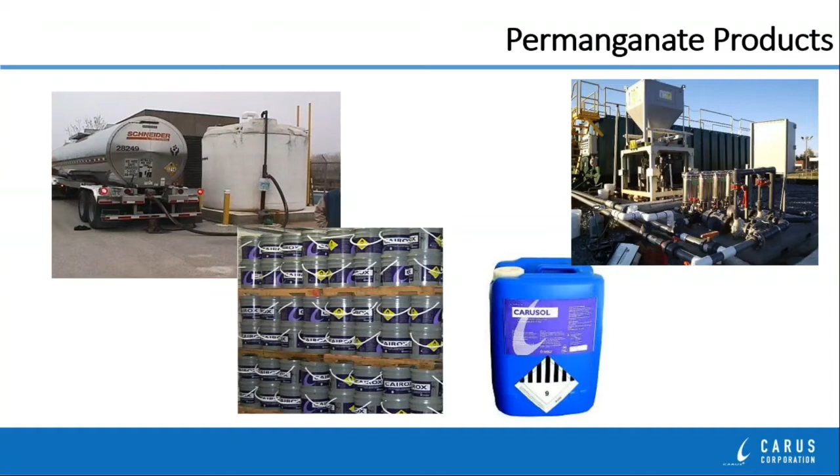So let's start with the permanganate products. Hopefully many of you are already familiar with how permanganate is packaged and delivered, but let me review that real quickly here. First of all, permanganate is available as a dry solid material. That's the CAIROX brand material that is potassium permanganate in its chemistry. It's available in different product grades, starting with technical grade, and probably the most popular grade is the free-flowing grade. They're essentially the same product, except that free-flowing has a desiccant that's blended into it at about 1% concentration.

So the product assays vary by about 1%, but the idea of blending in a desiccant is that you retard or slow down any type of water absorption into the product from the humidity in the air, and that prevents it from caking or lumping when you're storing it for a long period of time as a dry crystalline material, especially if you're storing it in a silo or in some type of hopper that feeds a dry chemical feeder.

In addition to those two popular grades, we have permanganates that are 99% pure, and those are the pharma grade materials which conform to the US Pharmacopoeia, and also ACS reagent grade, which is the type of permanganate that is typically packaged in small 1 or 5 pound jars and is used in laboratories for reagent use. The dry permanganate comes in a packaged sealed container and is quite stable over a long period of time in that sealed container.

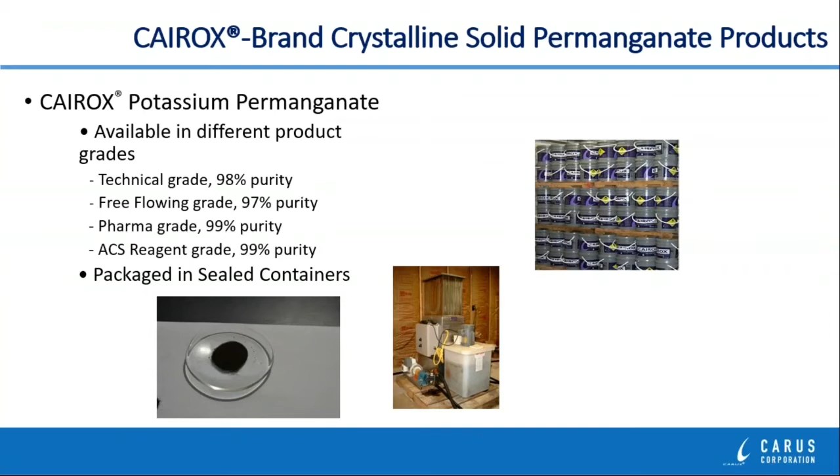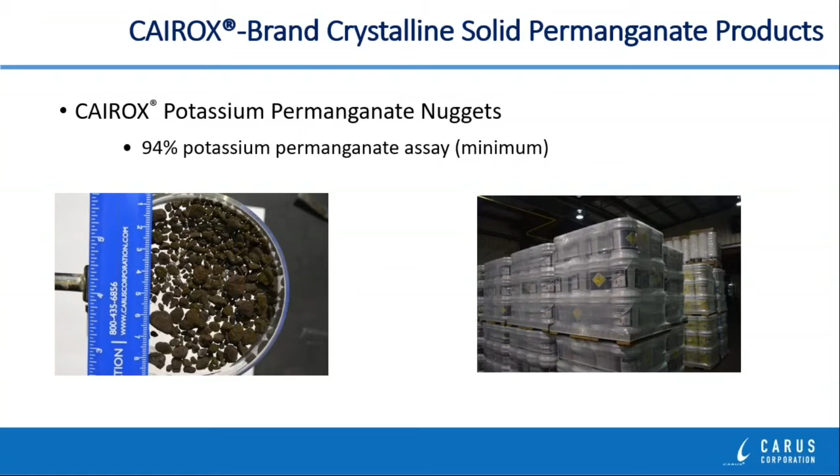Now, there are some special physical sizes of dry permanganates that are also packaged and delivered. Here you can see a reference to permanganate nuggets, which are slightly less pure than the other products, but they come in rather large, chunky crystal sizes. That allows them to be used especially for broadcasting into water ponds or lagoons where they can sink slowly to the bottom through the water column. And also, if you're outdoors doing this, they are less dusty than some of the finer powdery technical or free-flowing grade materials.

We also now are producing slow release or controlled release permanganate tablets. These dissolve very slowly when they're immersed in a flowing water stream and provide a relatively constant dosage depending on the flow rate of the water.

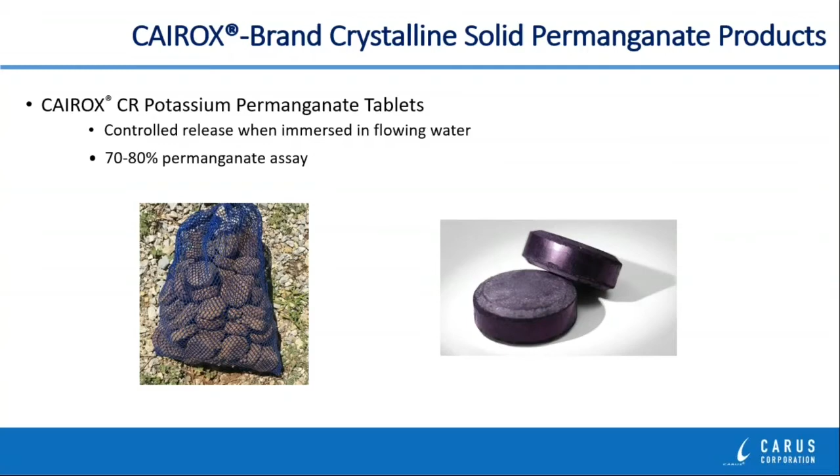They're really used for locations where it's not possible to set up a dry chemical feed system or a liquid feed system of any type, maybe because there's no electricity available or no mixing water available at that site, or a site that might be submerged in some way, and they're quite popular in wastewater treatment applications.

In addition to the dry crystalline products, there are pre-mixed concentrated liquids that are available under the CARUSOL brand name. And there are really two grades of material that we supply currently. One is 20% active ingredient. It's called CARUSOL liquid permanganate. And the second is a 40% active ingredient called CARUSOL C, or concentrated liquid permanganate. And it is available in a variety of different sealed package container sizes.

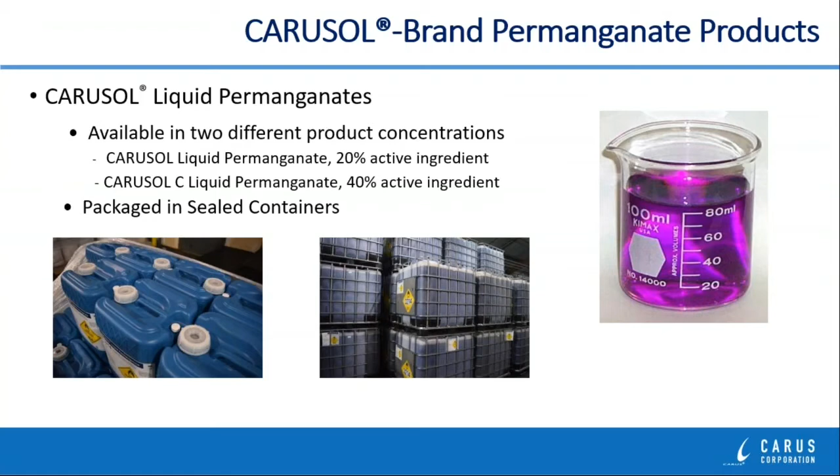So what is permanganate? The potassium permanganate chemical formula is KMnO4, and the liquid permanganate products are sodium permanganate, whose chemical formula is NaMnO4. As I mentioned earlier, it's a stable oxidizing agent, which means we can produce it and package it and deliver it as a dry powder or as a concentrated liquid. And it can be stored and delivered to the end user and stored there for quite a long period of time. It has a shelf life that is really greater than a year.

Also, because it's stable, it's pretty inherently safe to have around, especially if it's in its closed container. There are some specific recommendations for storing these materials, but there are no decomposition products, no degassing that occurs with these products. So they're very, very easy to use and to store.

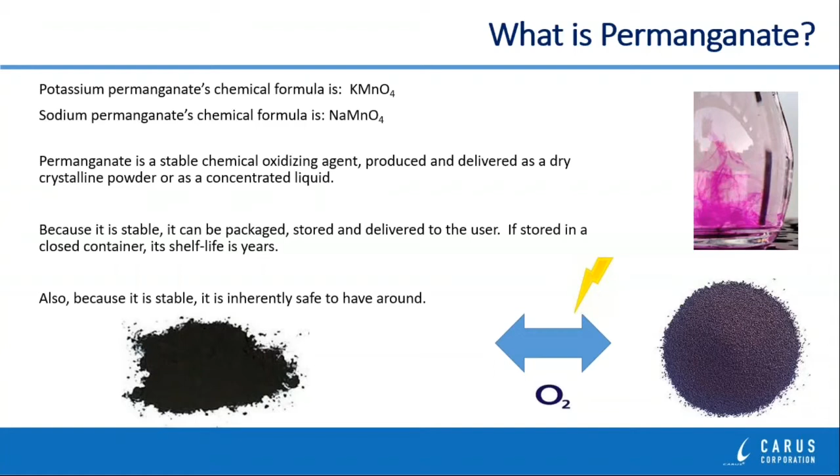These products are manufactured in our plant in LaSalle, Illinois. We receive manganese oxide ore, which is mined out of the ground, and then we react it in a large reactor where we use oxygen and also some electricity to increase its oxidation state from 4 to 7. And when we get to 7, we are at the permanganate state. And when the customer uses permanganate, they are simply taking that oxygen and that energy back out again and returning the permanganate down to its manganese oxide ore state again.

Now let me focus a little bit on permanganate chemistry. First of all, I put permanganate really into two buckets, which make it easy to identify. First of all, permanganate is a manganese compound. I bring that up primarily because it's very easy to confuse manganese and magnesium, which are really two different types of elements. So remember that permanganate as a manganese compound is a transition metal, and it's in the periodic table right next to iron in that particular row.

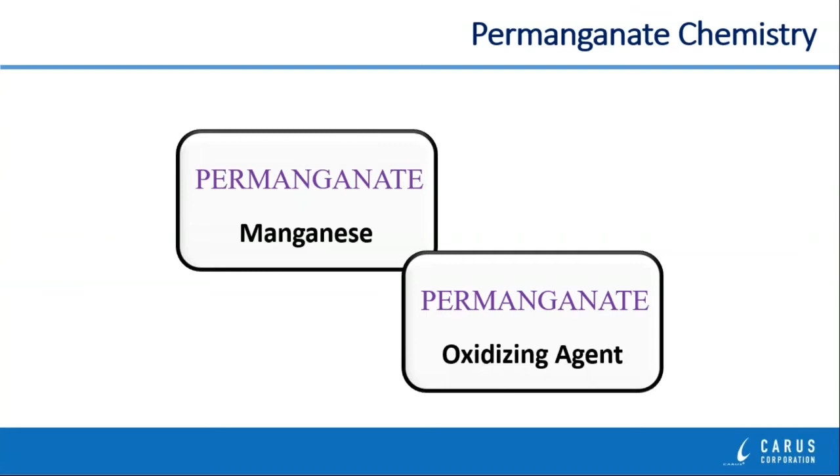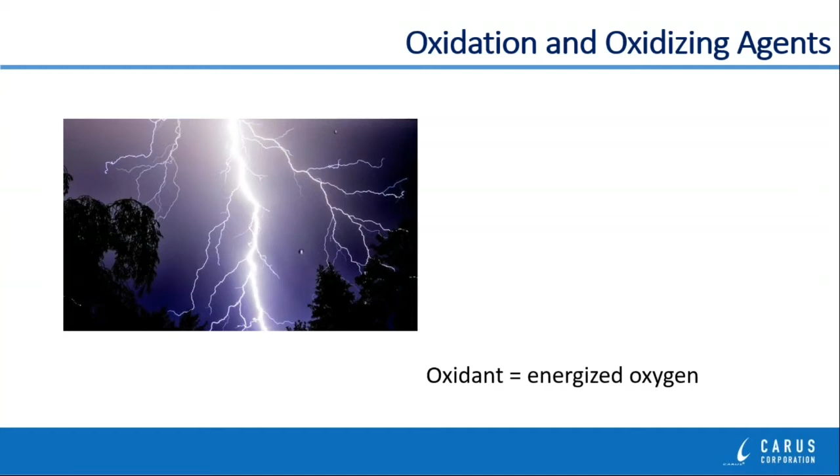Now, permanganate is also an oxidizing agent. As I mentioned, when we manufacture it, we put some energy into the manganese, we add some oxygen to it, and it's that oxidizing nature that the customer is using when they use the product. Oxidizing chemistry shouldn't be a foreign topic to everybody. In the easiest explanation of what it is, I just refer to it as energized oxygen. And of course, that's something that we use pretty much every day.

The reason for that is because we live and survive in an atmosphere that is a very high percentage of oxygen. So we are surrounded in the environment with different types of oxidation reactions that occur. Everybody should probably be familiar with just the rusting of iron metal, which is a reaction with the oxygen in the air and the iron metal itself to form the red iron oxides. That's a rather slow process, and it takes a long period of time to go to completion.

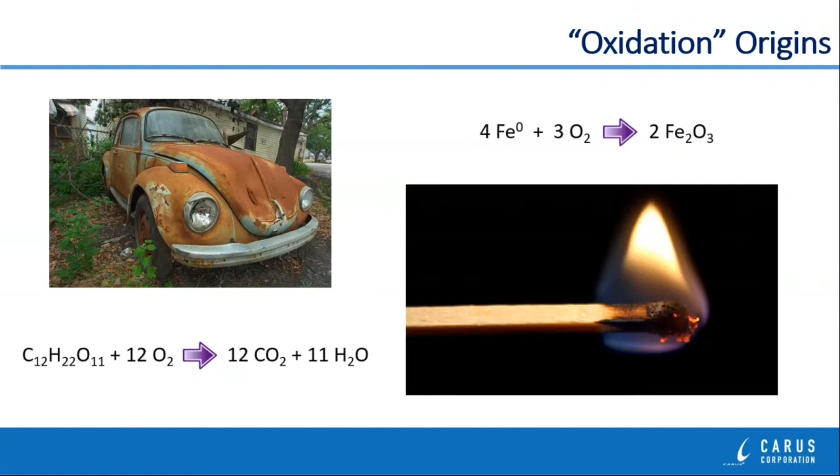There can be oxidizing reactions that take place that are very rapid and very fast, such as the burning of fuel. And they're fast enough and rapid enough that the exothermic nature of that reaction produces light and heat when it occurs. And the complete oxidation of organic materials, in this case a wooden match, will eventually end up as just carbon dioxide and water if the reaction goes to completion.

Now, to the chemists, oxidation and reduction reactions really have to do with the transfer of electrons from one compound into another. And that's a little bit more formal explanation of what it is, but the transition metals such as manganese and such as iron are really good at giving up or accepting electrons in different types of reactions that they might be involved in.

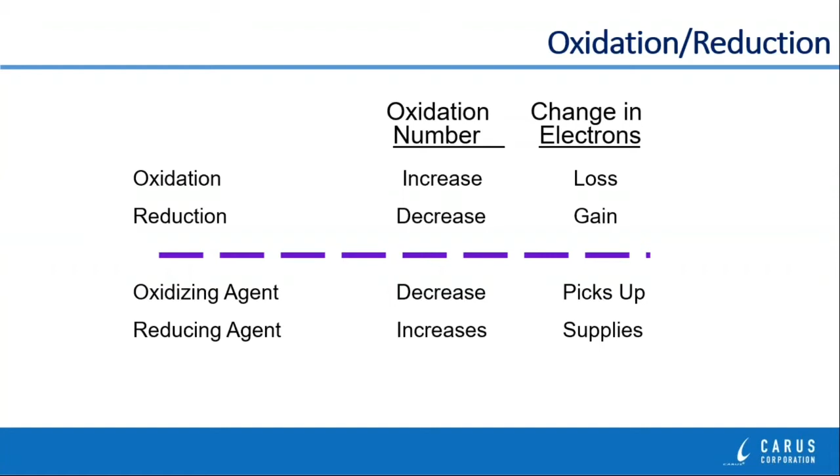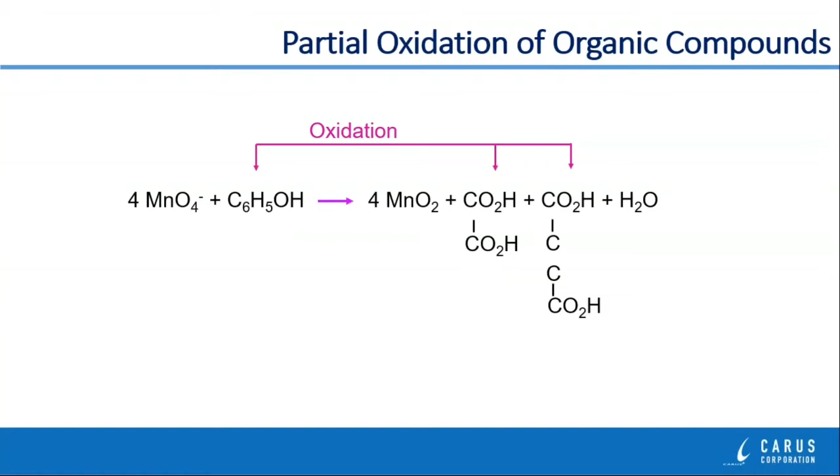Here's an example of an oxidation reaction that we would typically have with an organic molecule in most of the environmental oxidation reactions that we're doing. I mentioned earlier that a complete oxidation reaction with an organic material would go to carbon dioxide and water. In the environment, that typically never really happens because the conditions that we're following aren't rigorous enough to drive it to that endpoint. So typically what you have is the oxidation of an organic molecule where you're fragmenting it, taking a big molecule and turning it into smaller molecules. In the case of permanganate, organic acids are a very common byproduct or end product for that partial oxidation reaction.

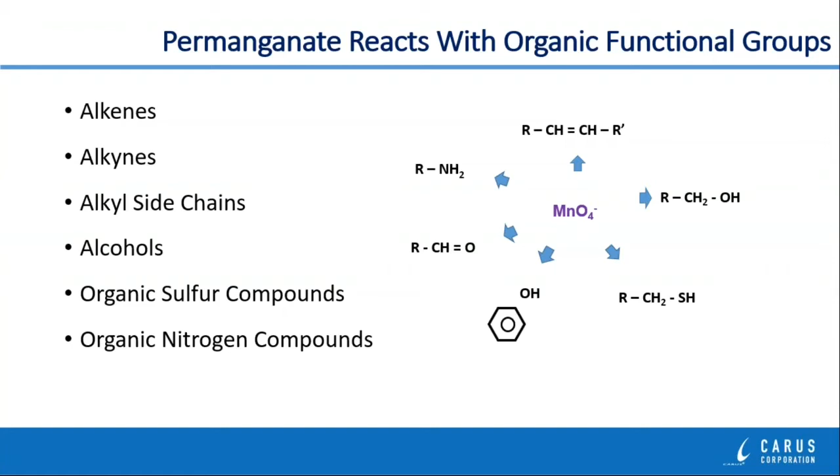We may also react with alcohol groups or the sulfur equivalent of an alcohol group, which would be a mercaptan. You can react with some aromatic groups, especially if there are electron donating functional groups on the ring. So the case of phenol that you can see in the lower left-hand portion of the diagram reacts very, very quickly with permanganate. You can react with alcohols, aldehydes, ketones, and esters very nicely with permanganate as well. And then the nitrogen equivalent of an alcohol group, which would be amine groups on an organic molecule, react very nicely with permanganate too.

In most reactions that you deal with in chemistry, the pH conditions will affect the reaction speed and in some cases what the endpoints are. In the case of permanganate, we don't really worry too much about the pH of the reaction because most of our reactions occur in the pH range of 3 to 12. And in those cases, we're going to accept 3 electrons on the permanganate, and we're going to produce that MnO2 solid material, the manganese oxide, that is familiar in most permanganate oxidation reactions.

There are some differences that occur if the system is extremely acidic. So here I'm showing that as less than pH 3, where you may have a complete 5 electron transfer occur. Or when the alkalinity is very high, that I'm showing here as greater than pH 12, where you can accept 1 electron and go from permanganate to manganate species very easily. But those 2 extreme conditions are very rare in most of the applications that we'll be talking about today.

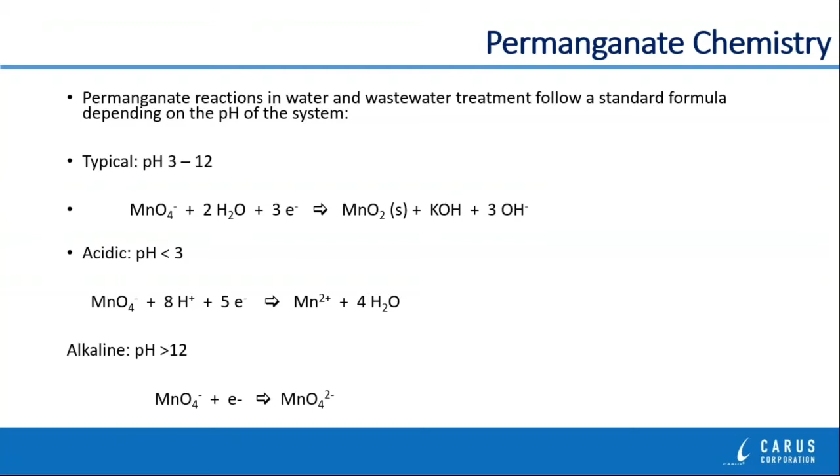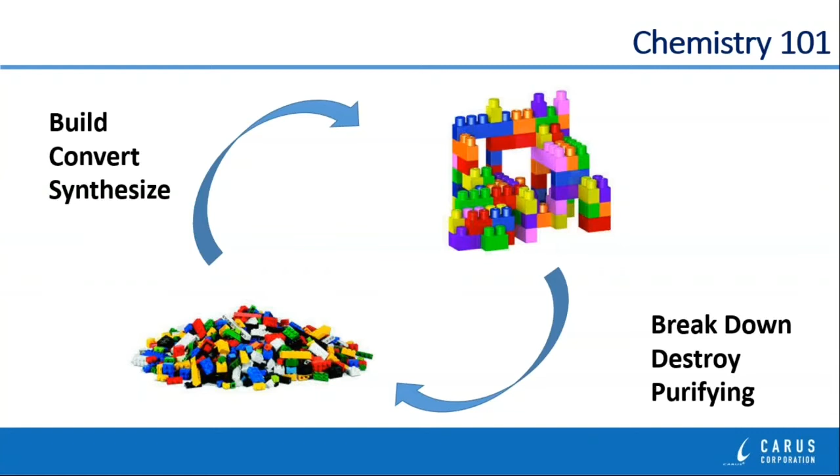Now let me talk a little bit about oxidation chemistry in general. It's really kind of a fun chemistry. It's a chemistry that you can read about in the chemistry textbooks, especially organic chemistry textbooks, because most chemists are interested in using oxidation chemistry to build or synthesize some type of particular end product that they need as an active ingredient or as some type of useful organic that can be used in a different kind of application. That's a little bit different than a lot of the applications that we deal with on a daily basis, which are those on the right-hand side of this screen, which talk about breaking something down or destroying it or purifying it. So we're going in sort of the opposite direction. We're taking large molecules and making them into smaller ones.

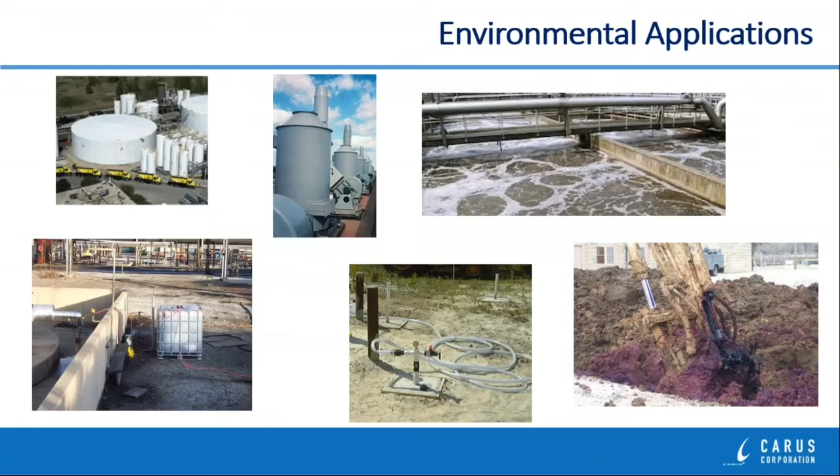So let me talk a little bit about several of those environmental applications. First of all, there are the applications where we're treating a contaminated soil to remove very specific types of impurities that might have been disposed of improperly there in the soil. If you want to reuse and build on this particular site, it's necessary to go in and remediate it in a relatively short-term type of application.

And here permanganate is used quite often, in particular to remove or destroy trichloroethylene or perchloroethylene, which are used as cleaning solvents in a lot of cases, and have seeped into the ground and can contaminate groundwater supplies. In some cases, the contamination can be deep underground, so the permanganate is actually injected through different types of wells that are inserted into the site. And sometimes the contamination is relatively close to the surface, where the permanganate can just be mixed in to the soil and allowed to react very, very quickly there.

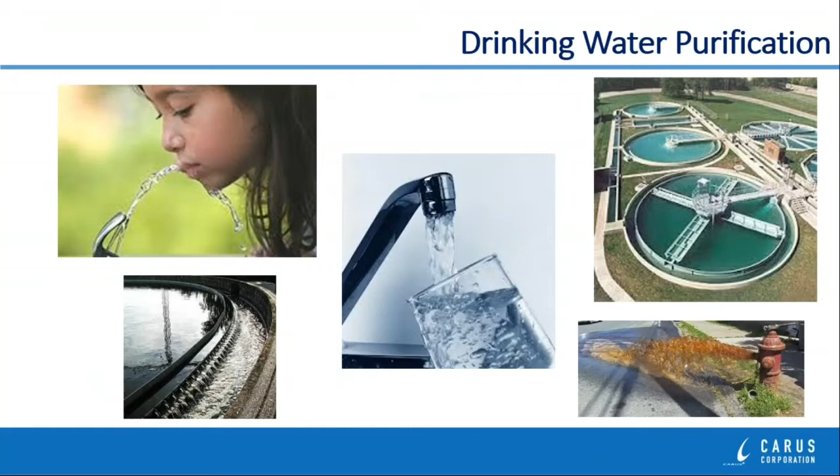Of course, permanganate has a long history, really about 100 years of history of being used to purify our drinking water supplies. There are several things to know about that. First of all, permanganate is used both with surface water supplies and with groundwater supplies. And of course, you can really categorize the contamination into one of two categories. Those are inorganic, natural, or man-made species. And in that category, you have metals in particular, such as iron and manganese, that can appear in either surface waters or groundwater supplies. Certainly sulfide material can be quite common in these supplies as well and can be found in either one of them.

In groundwater supplies, we also run into a couple of different types of contamination. We can run into radium, which is a naturally occurring material. There's no real oxidation reaction that takes place, but the radium is absorbed onto the manganese oxides that are produced from permanganate reactions and can be removed when those manganese oxides are filtered out of the system. In the case of arsenic, we're really talking about an oxidation reaction from arsenic 3 to arsenic 5, and then arsenic 5 can be absorbed onto metal oxides as well. Either iron oxides or manganese oxides work very, very well for arsenic absorption.

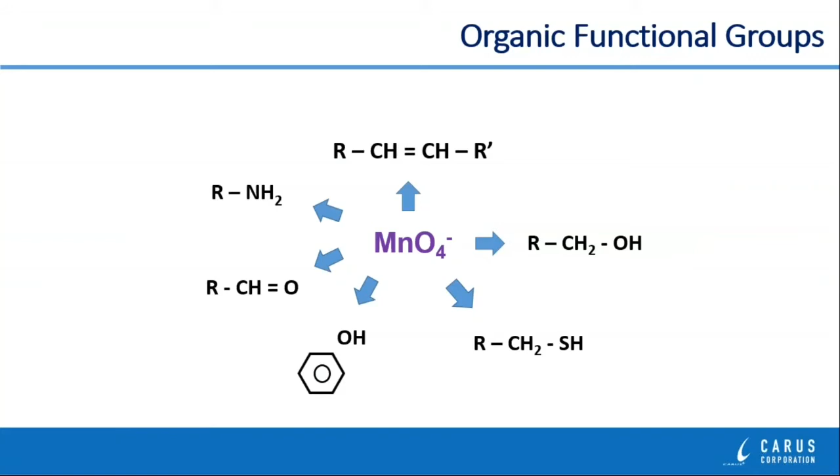So why is it important to think about the permanganate reactions and the functional groups that might be on an organic molecule? Well, it turns out that those functional groups and the structure of that organic molecule are what contributes to its characteristic taste or odor. If it's volatile and it's released from the water supply, our noses are quite good at monitoring these organic molecules and detecting them as some type of characteristic odor. And if we can, through oxidation treatment, attack or destroy those particular functional groups, it's possible then to get rid of the characteristic taste or the characteristic odor.

So in the case of permanganate, we're looking to react with the double bonds or triple bonds on those structures, or the functional groups such as the alcohol groups that might be present there. And there's another double bond that we might attack. And by breaking those organic materials down, our goal is to make them tasteless or odorless.

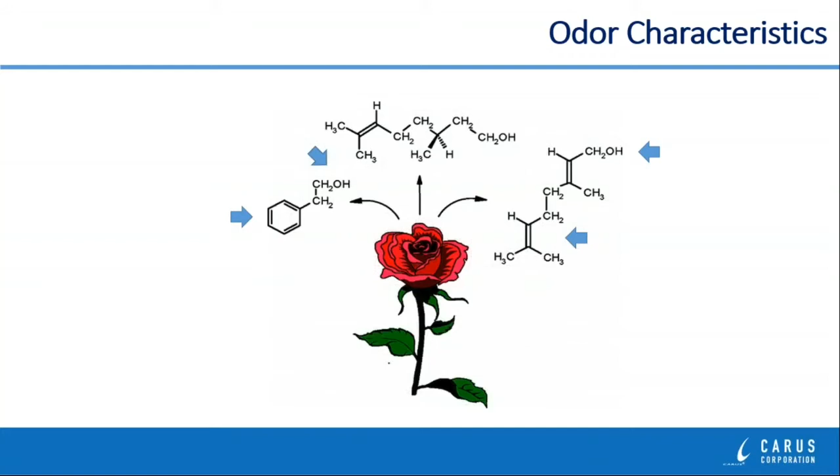Now let me concentrate very immediately here on inorganic compounds, because they're very, very easy to follow. There aren't that many oxidation reactions that we use on a daily basis to remove inorganics from water. The two most common ones are the removal of manganese or the removal of iron from water supplies.

And we do that simply by taking the dissolved ionic species, manganese 2 or iron 2, and converting them through oxidation chemistry to their byproducts that precipitate out as solids. And then our water treatment systems, especially our filters, can remove those solids and remove them from the water supply.

Hydrogen sulfide is removed by oxidation chemistry, and we go in a complete oxidation reaction from sulfide to sulfates. But there are many different byproducts of sulfide oxidation that can occur, everything from sulfur to sulfites to all the way to sulfates.

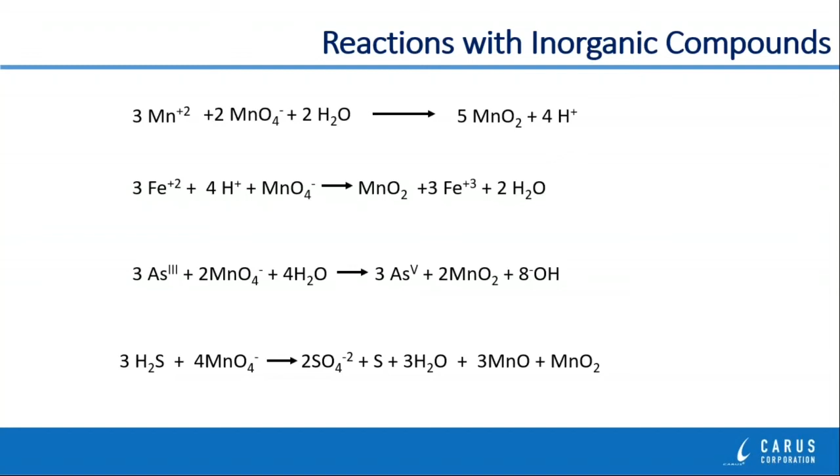The oxidation of soluble manganese is very well known when we use permanganate to do it. In fact, if you look at any textbooks, or if you travel globally and you talk to people about water treatment with permanganate, almost everybody will recognize that permanganate can be used to remove soluble manganese from water supplies. It's a very efficient way of doing it because you have two manganese compounds reacting together.

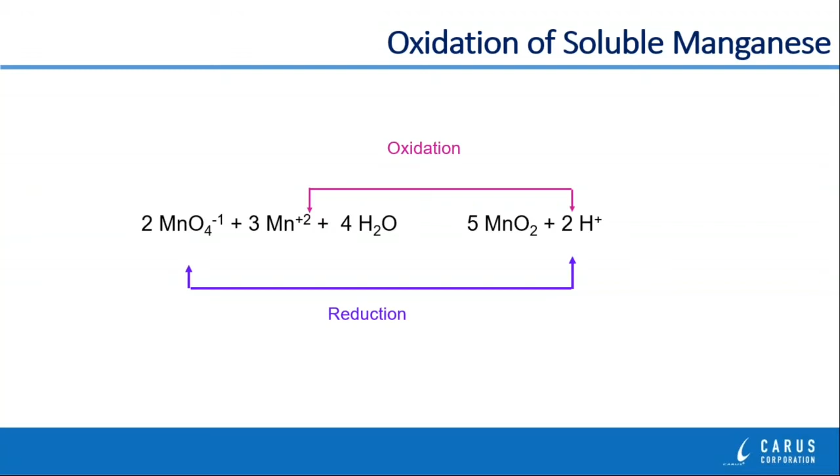So you form a large amount of MnO2 solids, and you can use those solids in a variety of different beneficial ways. One of the ways that we do that is, as I mentioned, by absorbing radium from groundwater supplies onto those manganese oxides. This was a reaction and an application that was investigated at the University of Iowa and has been instituted and applied now on full-scale systems.

In this particular case, we don't need the permanganate because there's no reaction with the radium there, but we do need the permanganate to react with manganese salts to produce the freshly precipitated manganese oxides that are used to absorb the radium out of the system.

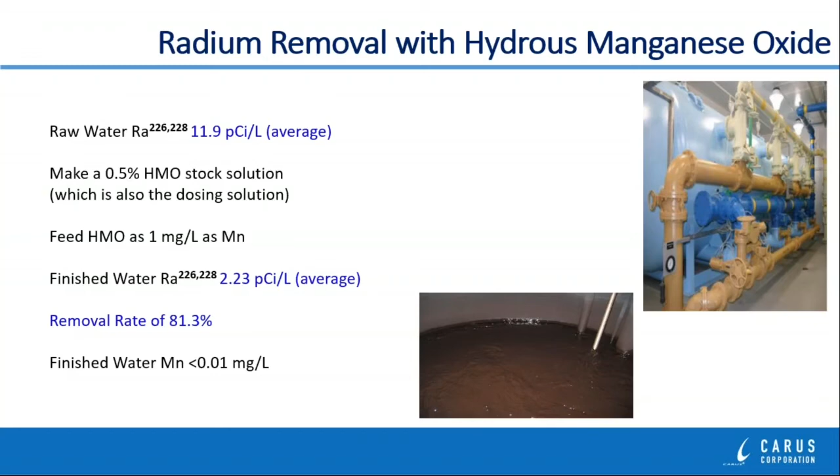Typically, these systems are groundwater supplies, so they have some type of pressure filter system associated with them. And there you can see a tank of the brown or black looking manganese oxides that we've produced. And those are injected directly into the water supply to do the absorption.

So in surface water supplies, we know that one of the contaminants that we can run into is biological in nature, and that's blue-green algae or cyanobacteria. The water industry has known about cyanobacteria for really decades, and they know it because it can grow in very, very high concentrations, and in fact create what are now referred to as HABs or harmful algal blooms.

We know what algae can do to a water system, right? Because of the high biomass, it can cause clogging of intake screens. It increases the requirements for coagulants because of all the biomass that's coming into a plant. If we're carrying it all the way to the filters, it can create short filter runs and increase backwash requirements.

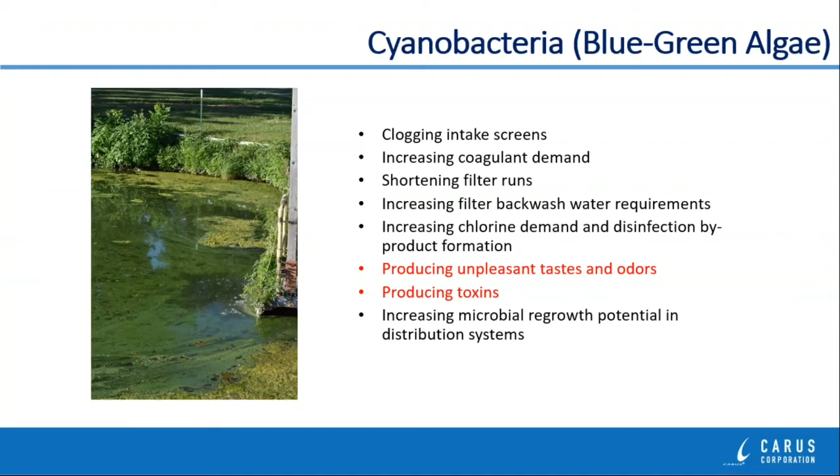It of course increases the demand for chlorine, and in doing that, it creates a lot of disinfection byproducts in reacting with the chlorine. We've known for a long time that they can produce compounds that create unpleasant tastes and odors in the water. And now, of course, we know that they can produce different types of algal toxins as well. So we're looking at all of these as organic materials and how can we control them, and how can oxidation chemistry help to control them.

So we would describe the characteristic as maybe being grassy or medicinal or fishy or musty, earthy in nature, or flowery. And this was before we maybe had the analytical capabilities of identifying specifically what the compound was that would be giving us those types of characteristics. So we would use odor panels and people's noses, right, to identify the intensity of that odor associated with water, and that panel would characterize what the odor was that they were smelling.

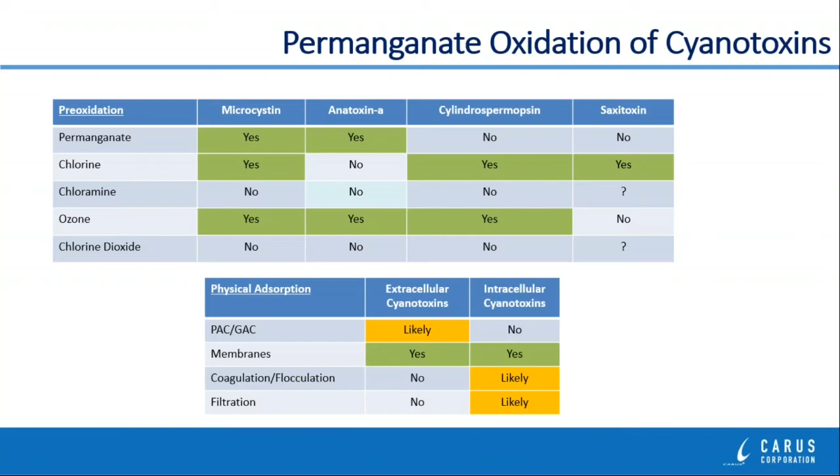Different types of filtration membranes remove these products. If these cyanotoxins are part of the bacterial cell, still their blue-green algae cell, then coagulation, flocculation, and filtration will likely capture a lot of them as well. But again, there is no silver bullet, and what we rely on in the water industry is a multi-phase approach or a multi-stage approach to removing any of these particular types of contaminants that we might find in a raw water supply.

So where is permanganate used in a drinking water supply? It's usually added as one of the very first chemicals in the treatment process, usually directly to the raw water supply itself. Why is it used early in the treatment process? Well, there are really 3 or 4 particular reasons. First of all, as you've seen from some of the pictures that I've been showing today, when you put permanganate into water, you have a very characteristic pink or purple color that is formed from the mixing of permanganate and the dissolving of permanganate in the water.

Well, we want that pink or purple color to go away early in the process. So we want the reactions to take place early, and we need a little bit of time for those reactions to take place. So if permanganate can be the first item that goes in, that usually provides us with some time before the flocculators or before the rapid mix even, where our coagulants are added. Remember, when permanganate reacts, it precipitates out as a manganese oxide floc material. So we want to be able to capture that material and settle it out in the water treatment process, or at least filter it out in the water treatment process.

So we would like to have all that MnO2 formed at the point of coagulant addition, which is typically at the rapid mix. If we can't get it formed that early, it can still be removed in the flocculation zone pretty typically, so that we can take advantage of the time in that flocculation zone as well. But we try not to carry it too far into the sedimentation basin because we do want it to grow in size and we want it to settle out before we get to the filters.

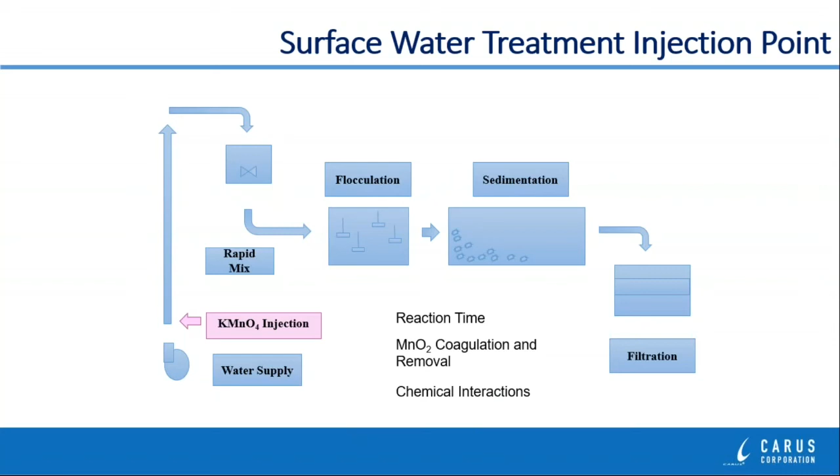In groundwater systems, I mentioned typically what you will see is a pressure filter of some type. Now, because in groundwater supplies, what we're usually trying to remove are sulfides or dissolved iron or dissolved manganese, the advantage we have is that those reactions are very, very rapid. They go within a matter of minutes. And so the short period of time in the pipeline ahead of the filter and the headspace in the filter itself provides us with more than enough time for those reactions to go to completion.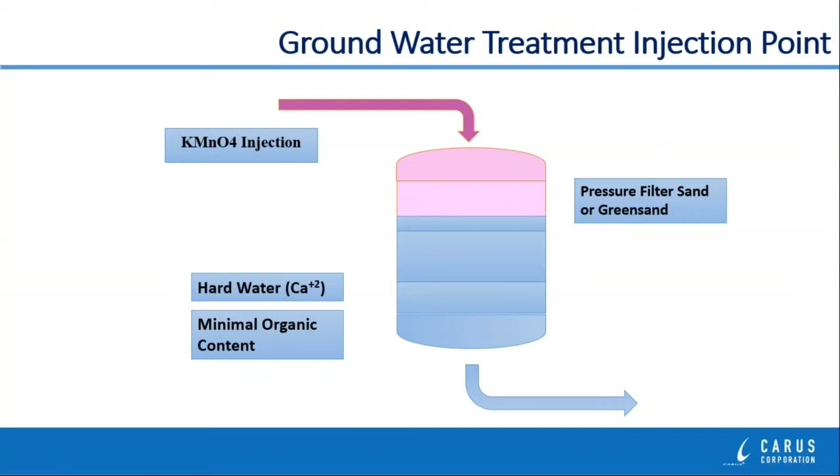In some cases, the pressure filters use special sand in them that is referred to as greensand or manganese treated greensand. And that sand is also an oxidation chemistry and can remove some iron and some manganese on its own as well. But typically, permanganate is fed continuously ahead of a greensand filter so that you have the combination treatment of the permanganate and the sand itself for removing those particular types of compounds.

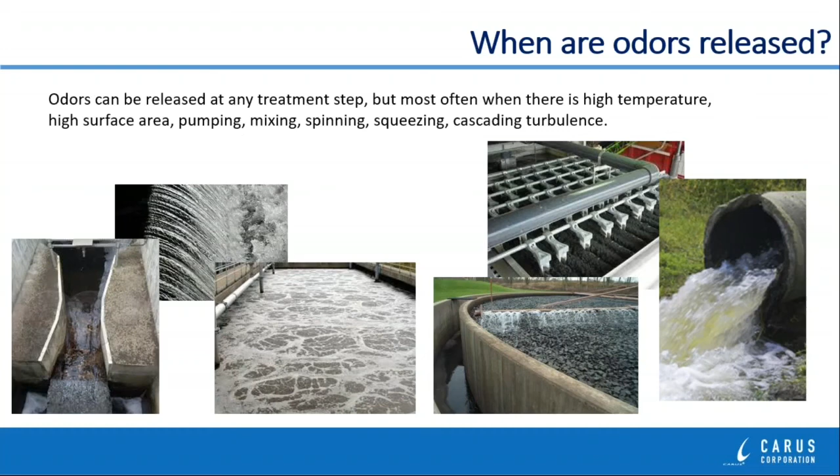They are released wherever you have turbulence being created in a wastewater system, because the turbulence allows that volatile material to leave the water and go into the atmosphere. The application treatment points for permanganate will almost always be categorized by where in the system we're talking about the odor occurring. So there can be permanganate systems that are used at the treatment plant site itself, especially at the headworks where the collected wastewater first enters the treatment process.

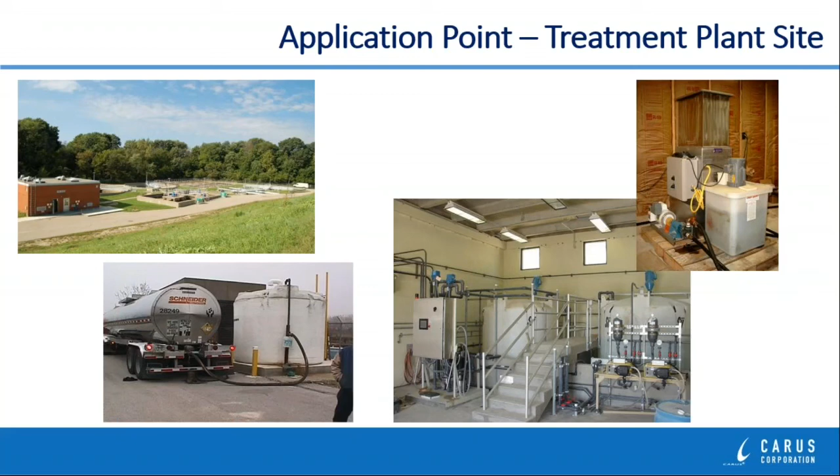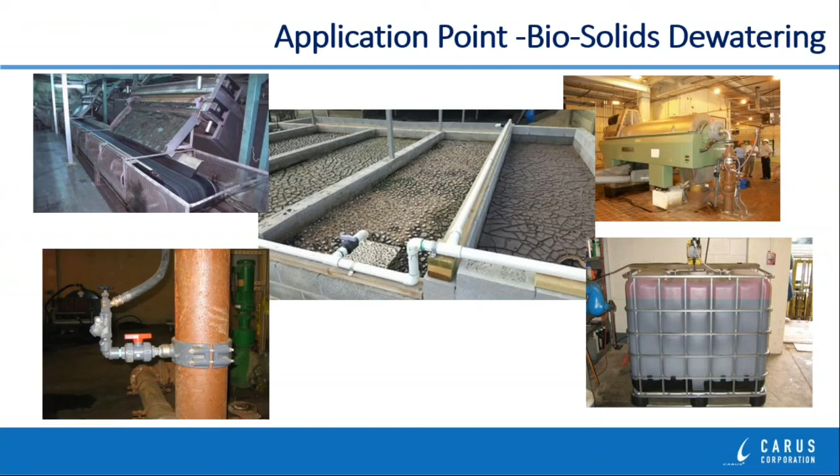We use permanganate quite often in the biosolids dewatering systems, where these mechanical devices strip the hydrogen sulfide or the odors out of the sludges and into the room where the dewatering device is located. Permanganate reacts very, very quickly, so it can be injected just a matter of minutes ahead of these devices. And in some cases, permanganate is used where sludge is still just dewatered by using drying beds where the water is allowed to evaporate away. But initially, they can be quite odorous, at least until a dry crust is formed on the top of these beds. So initially, permanganate can be sprayed on these beds as well to control the odors.

Permanganate is used in collection systems, typically at lift stations or where force mains meet gravity interceptors, and there's turbulence created and odors are released. Permanganate, again, is used very close to where the odor source is occurring because the reaction proceeds rapidly and to completion in a very short period of time. The one thing you do not get with permanganate, typically in collection systems,

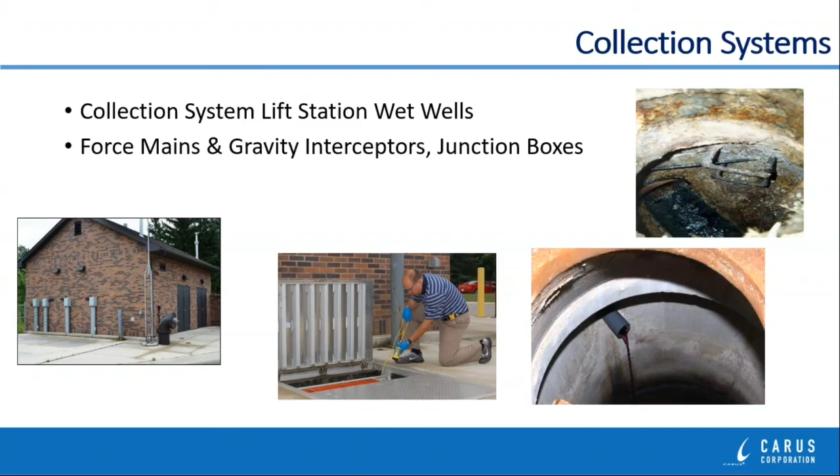John, it looks like we lost audio on your side. John, are you maybe muted on your end? No, it should be open. Can you hear me? I can hear you now. Okay, good. Thank you.

So we were talking about wastewater treatment, and in particular, we were talking about collection systems, and collection systems can introduce some hurdles as to how to apply a chemical product like permanganate and do the odor control you're trying to achieve. So the use of the controlled release tablets was really designed for these sort of locations where you can't set up a chemical feed system very easily, and you rely on the flow of the wastewater to dissolve the permanganate slowly and control the odor compounds, in particular sulfides, that might be present.

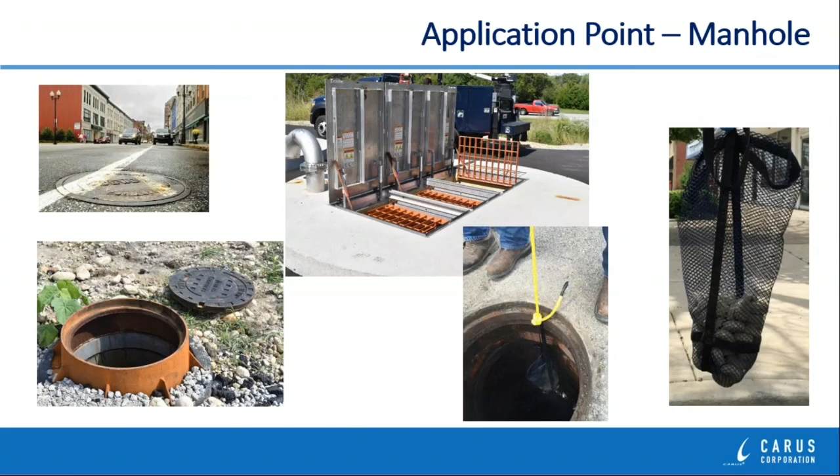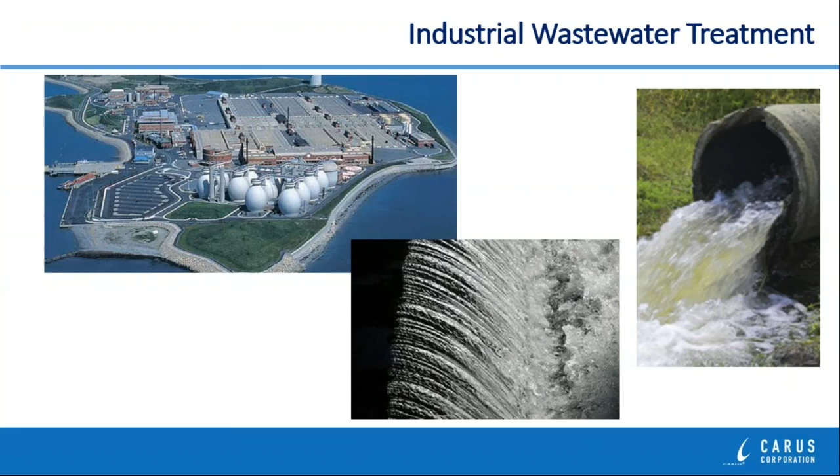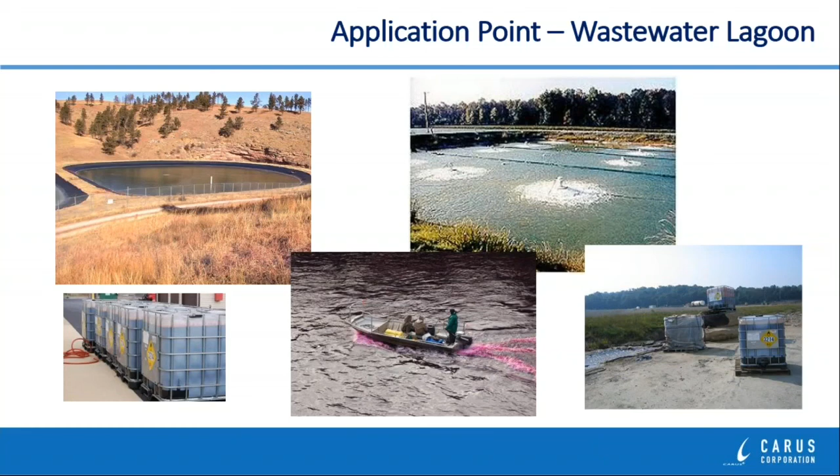Don't forget that we're not only talking about municipal wastewater treatment, but we may be talking about industrial wastewater as well. There are a lot of cases of industrial treatment where they're using lagoons for really collecting and equalizing wastewater flow rates. Sometimes these lagoons are aerated. Those are perfect locations for adding permanganate because freshly precipitated MnO2 and aeration work together in sort of a catalytic fashion to get rid of sulfide materials in particular. And we've even gone to rather exotic ways of applying permanganate by actually applying it from boats.

One of the areas on the industrial side that we've worked with quite a bit over the last 2 or 3 years is really at landfills where they're collecting leachate that's coming off of open cells, and the rainwater that might occur is percolating down through this waste, and then it's collected and can have a lot of odorous components that are associated with it, not the least of which is hydrogen sulfide.

Sometimes these systems are connected directly to a local sanitary sewer system, and they can be creating odor problems for that sanitary sewer system. And sometimes they're not close enough to be connected by pipeline, but they have to be connected by collecting the wastewater and then trucking it to a disposal site. At the disposal site, there can be a lot of odor released, but the permanganate can be added to the truck to destroy those odor compounds on the way to the disposal site.

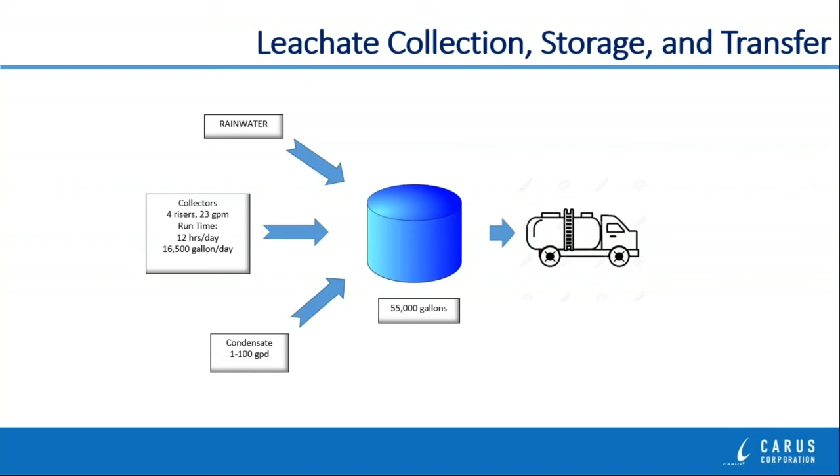We have mining applications where the chemistry is not really unusual. In this case, we're talking a lot about iron and manganese precipitation, but just the application point is different because this is acidic leachate that is coming off of a mining operation, and it's dissolving metals out of the soils and getting them into the water supply. So these systems often involve pH adjustment to neutral pH and then oxidation with permanganate to remove the iron and manganese.

Don't forget that odors can be associated with animal confinement operations as well, in particular with the spreading of animal manures, and permanganate has been used successfully in these types of applications as well. Now, there are a lot of industrial applications. Remember, our buckets go beyond just the environmental applications. So let me say a little bit about some of those.

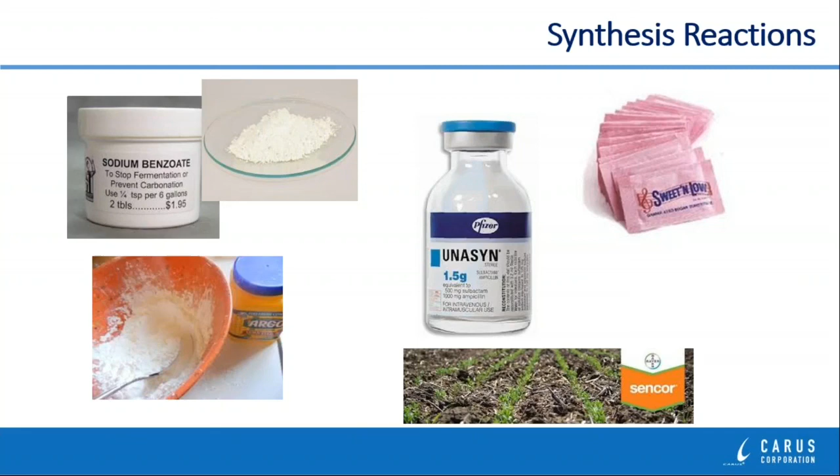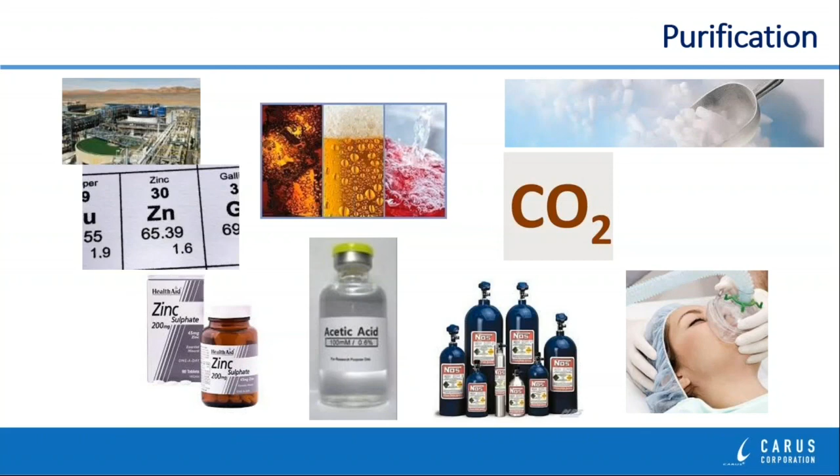Permanganate is used in synthesis reactions. It was used quite extensively around the globe in the production of saccharin when it was used as an artificial sweetener. And there are a variety of other compounds or organic materials that are produced using permanganate in an oxidation reaction in an intermediate step in producing those products. Permanganate is used to purify different materials such as zinc ores. Sometimes it is used to purify food grade CO2. And there were large applications for permanganate use in the purification of acetic acid.

Permanganate is in fact sometimes used as a bleaching agent. It is used probably in the largest application in removing the blue aniline dye from denim to produce different kinds of washed out or faded out blue jeans for fashion, high-end fashion uses. Permanganate is also used to bleach kaolin clay. It's used to bleach sponges and also beeswax that are used in candles. And it's also used to decolorize and bleach phosphoric acid.

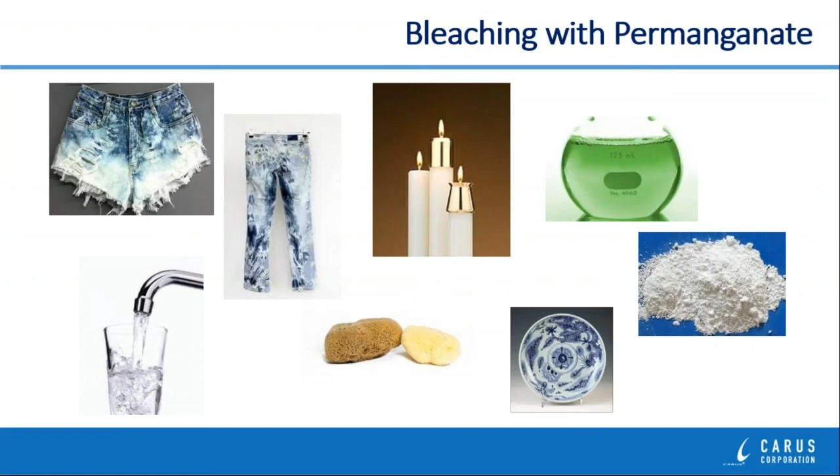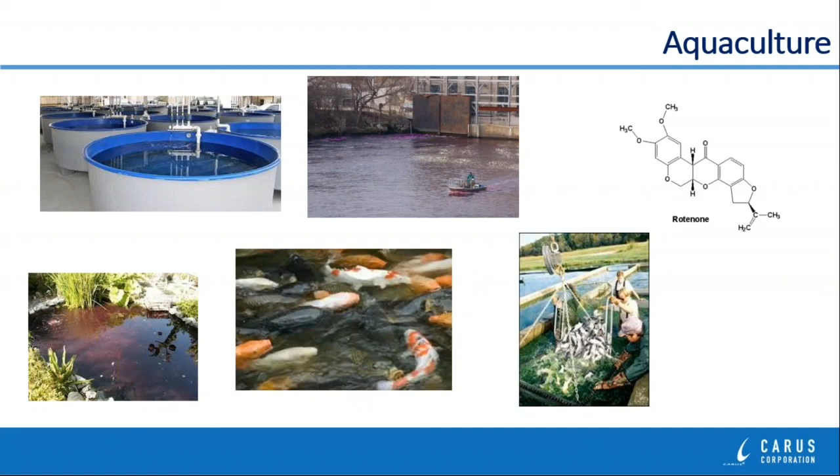The aquaculture industry, where we're raising fish in ponds or in raceways, uses permanganate. It is used primarily for removal of unwanted tastes and odors due to organics. It can be used to destroy and remove a fish poison, which is referred to as rotenone. And it is sometimes used to control external parasites and bacteria on the surfaces of fish under special FDA regulations.

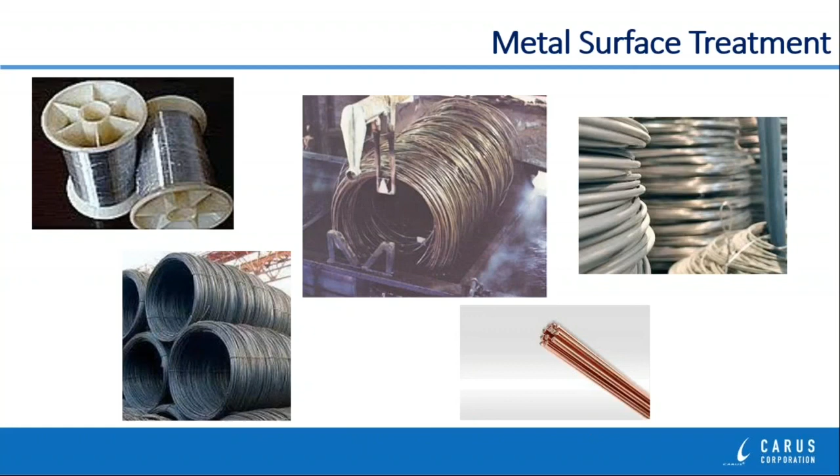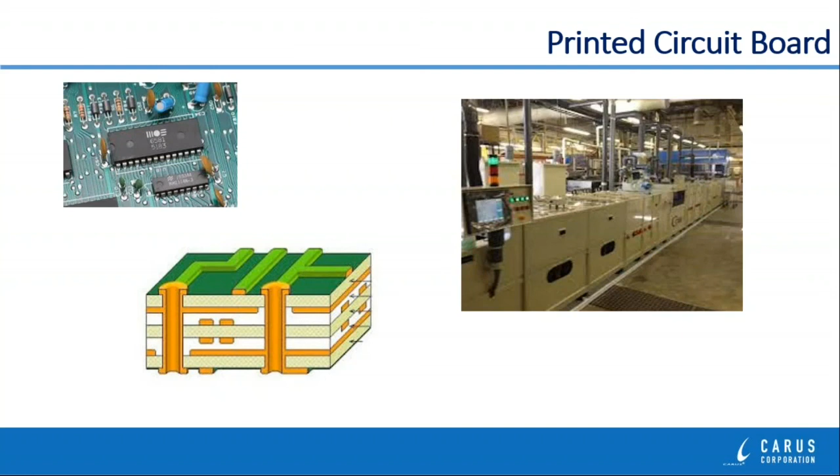Permanganate has been used to clean a variety of different surfaces. It is used to clean the surface of ferrous metals, in particular rod and wire, when that rod and wire is going to be coated in some way for decorative use or for specific industrial use, such as welding rods where they have to plate copper on the outside of the rod itself. Permanganate is used by the printed circuit board industry to clean the surface of the printed circuit board and prepare it for receiving copper plating, which is used to conduct electricity between the layers of multi-layered circuit boards.

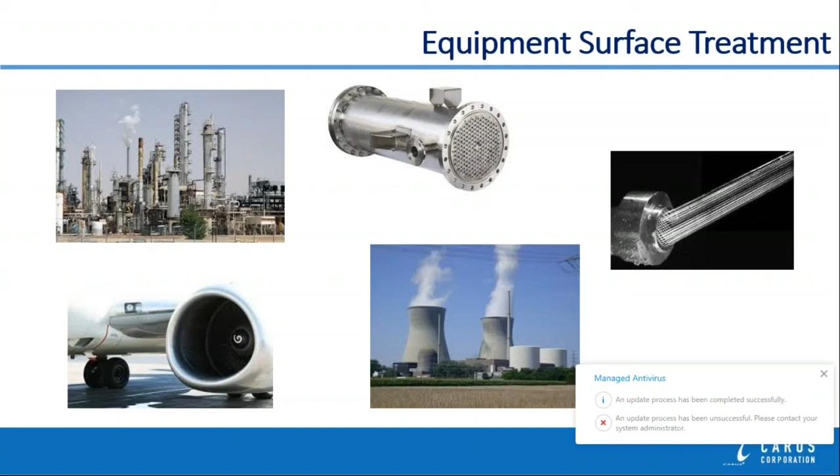And permanganate is used to clean equipment surfaces as well, everything from the hot sections of jet engines, where they can then be inspected during maintenance, to the insides of refinery equipment to remove pyrophoric iron sulfide in particular, and remove that scale from the inside of these processes so that they can go in and open them up and do maintenance on them.

Permanganate is used a lot in the oil and gas industry at refineries, where it is used, as I mentioned, to remove pyrophoric iron scale. It's used to treat phenol contamination in wastewater systems. It's used to control hydrogen sulfide in areas where you're dealing with high sulfur crudes, mercaptans, or the organic sulfur equivalents, some cyanide oxidation, some iron oxidation and precipitation as well in the produced water in the oil fields where oil and gas are being produced. And selenium is one of those cations that can be adsorbed onto freshly precipitated manganese oxides.

So just to close out and to summarize very quickly here, permanganates are available in a variety of different product forms, different grades, and they can come in a variety of different package sizes. Permanganate is used in chemical synthesis and purification reactions. It is used in a variety of different bleaching applications. And of course, the largest uses of permanganate are really what I call environmental reactions, which include the drinking water purifications and the wastewater treatment and odor control applications.